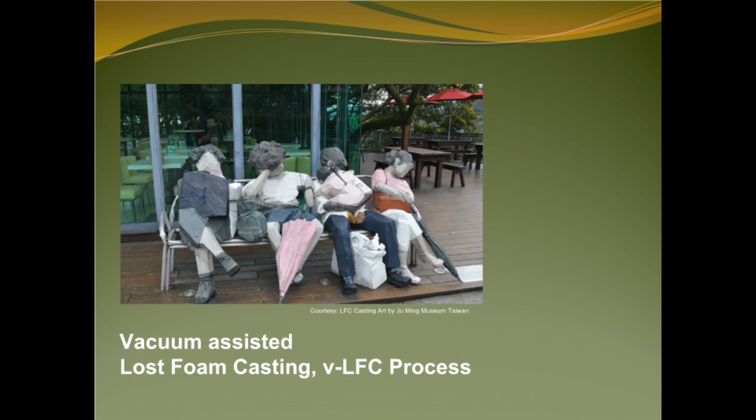Vacuum Assisted Lost Foam Casting, VLFC, is a third generation molding process, and it uses unbounded sand. Vibrating compaction and vacuum are used for stabilization of the free-flowing dry molding materials. Minimum wall thickness of 3 mm can be cast. Typical surface finish of 2.5 to 5 micron or 100 to 200 RMS can be achieved. Typical linear tolerances of plus or minus 0.005 mm per millimeter can be adhered to.

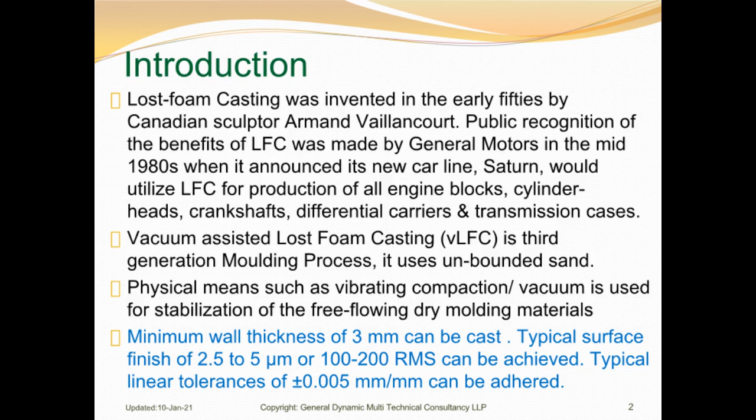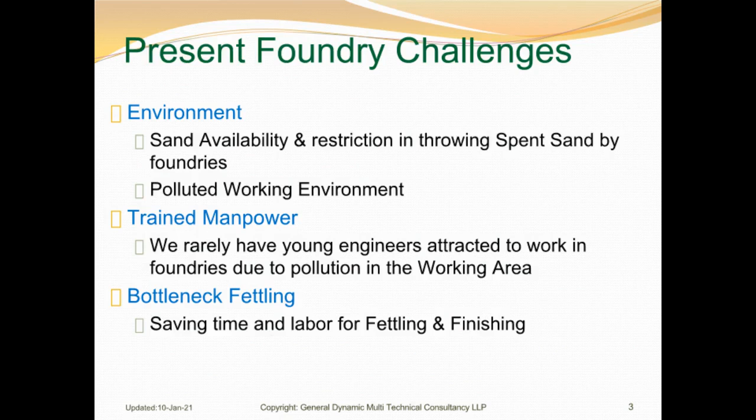We have the following challenges in a foundry today: environment, attracting capable manpower to join foundries, and cost of raw material and power. We promote efficient and modern molding processes and provide end-to-end services for smooth adaptation in your foundry.

Vacuum Assisted Lost Foam Casting Process, and Vacuum Process Casting or V process.

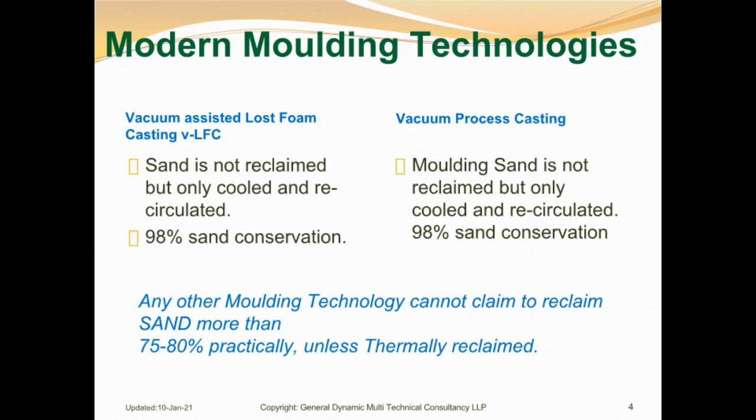Sand is a natural resource and soon going to become scarce. We are already aware of the sand mafia activities in various regions.

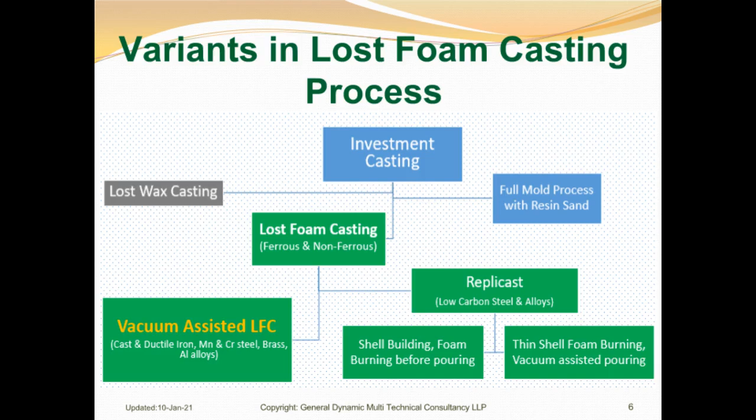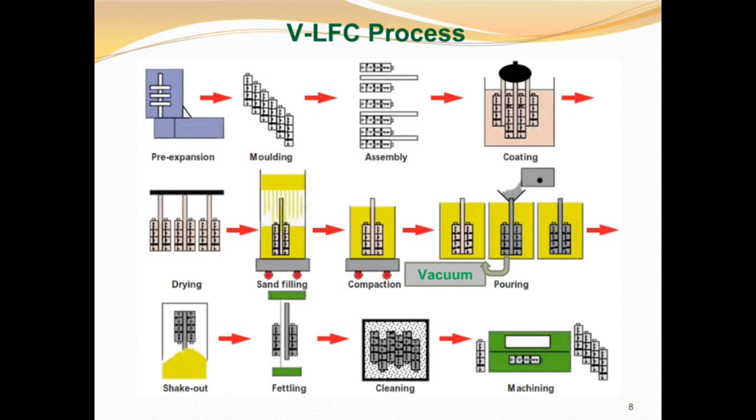Now let us discuss the vacuum assisted lost foam casting process, step-by-step. With 1 kg of EPS we can make 300 kg of castings, so in fact the pattern cost would be just about 50 paisa in the casting cost. That's still amazing to many of us.

Firstly, we have to make foam patterns. Either EPS beads are pre-expanded and foam patterns formed by a molding machine inside our aluminum shaped die, or we take EPS thermocol blocks and cut it to shapes needed by hot wire CNC or manual foam block cutting machine.

These foam patterns are assembled and made into clusters or trees in case of small castings, and then ingate, runner, risers etc. are prepared and glued. This tree is then coated with a refractory layer and dried for 4 to 6 hours.

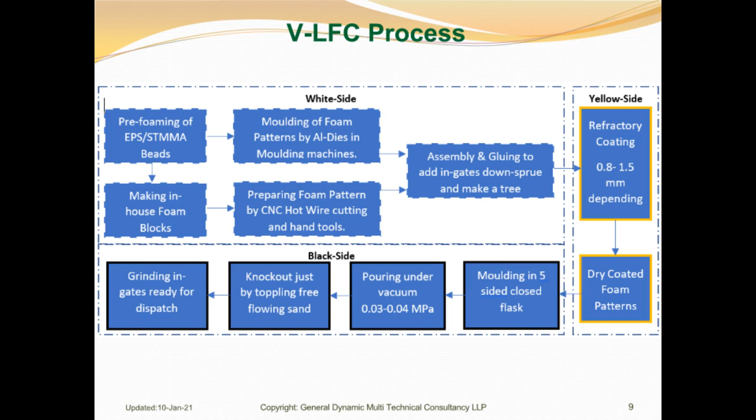This dried foam pattern assembly is put in a vacuum flask and sand is compacted around it with a 3D vibrator. The vacuum is applied while pouring for a few minutes. Then after cooling, the casting is brought to the knockout area, where the casting is extracted and the free-flowing sand goes for cleaning and cooling. It's the most economical molding process which can cast any size, shape and weight.

Optimization of casting weight between 5 to 10% by removing draft angles will save energy, not only in the casting process but in its product life cycle too.

Intricate parts can be cast. No core, so no core cost, no rejections due to core shifting. No fins, so only grinding of ingates is needed. Thin wall castings between 3 to 5 mm can be achieved.

Very good surface finish, 120 RMS. Machining work is minimized. Sand is reused with less than 2% losses. Much cleaner foundry environment. Ductile iron, grey iron, steel, aluminum, brass, Mg - all can be cast very successfully.

Ferrous castings between 5 kg to 8 tons. Most adaptable is the 20 kg to 500 kg weight range, though now expertise has been achieved to cast even 12 to 18 ton castings by VLFC.

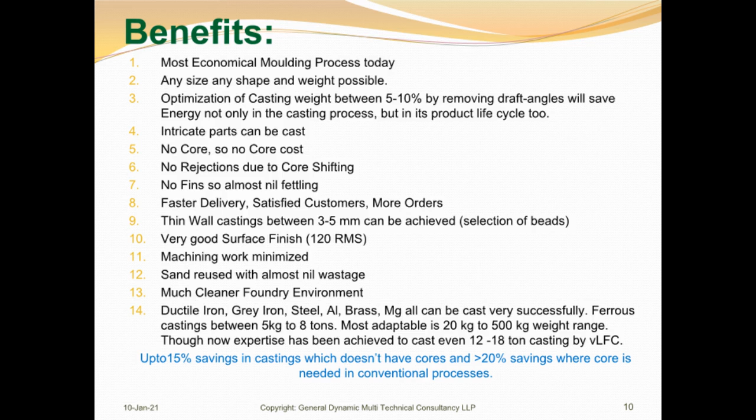Faster delivery, satisfied customers, more orders. Up to 15% savings in castings which don't have cores, and greater than 20% savings where core is needed in conventional processes. Often OEMs in today's competitive age tend to work at zero inventory levels.

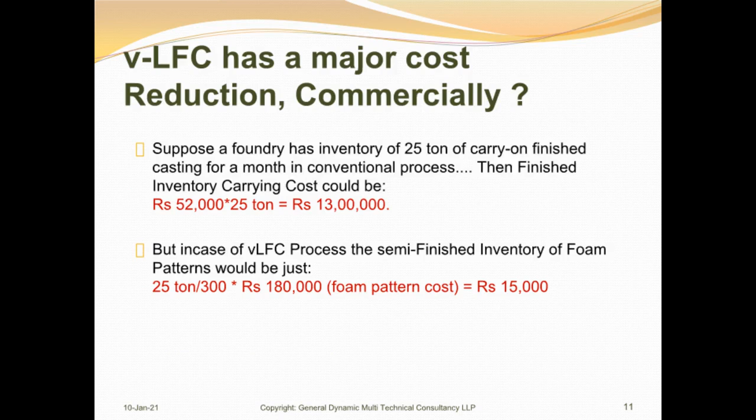The burden is often passed on to their vendors. The more inventory as finished product, the most cost to the foundry, eating away the profits. Energy saved by being efficient - LFC foundries can be maintained as most energy efficient foundries.

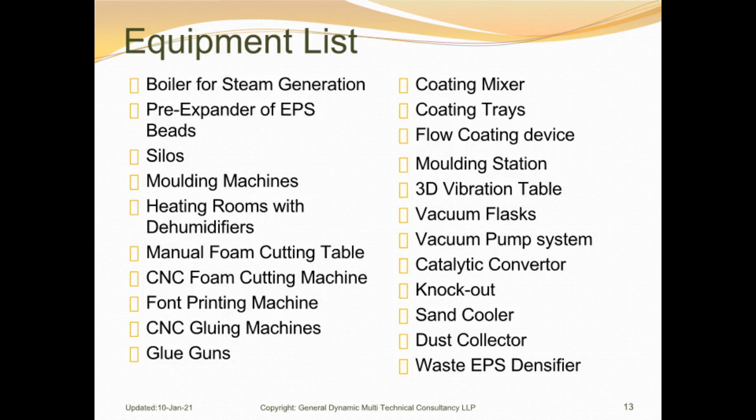This is the list of major equipment which completes our LFC foundry as a whole. There are a few more instruments for pentane measuring, testing coating permeability, and a physical lab and spectrometer. This capital cost is just being shared for an idea. We make a financial sketch of the project to help you in decision making.

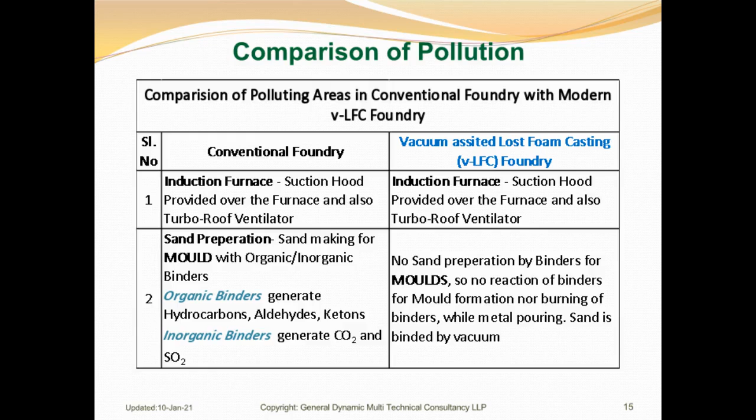Shop floor pollution is the greatest hazard for employees, and most foundries have dirty housekeeping. As a result, most new generation engineers avoid coming to join foundries.

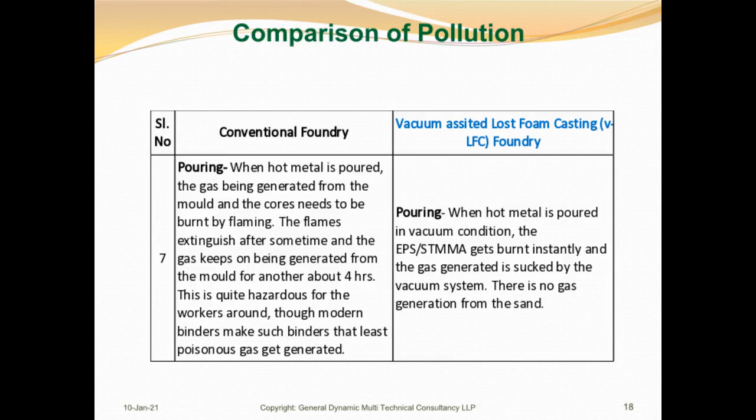LFC foundries can be kept very clean. There is nil release of fumes after pouring, because there is no binder in the mold or core. The LFC process can be considered one of the most environmentally friendly foundry processes of now.

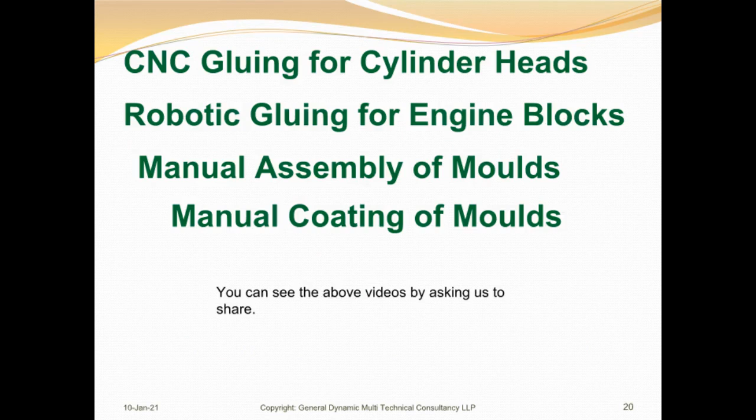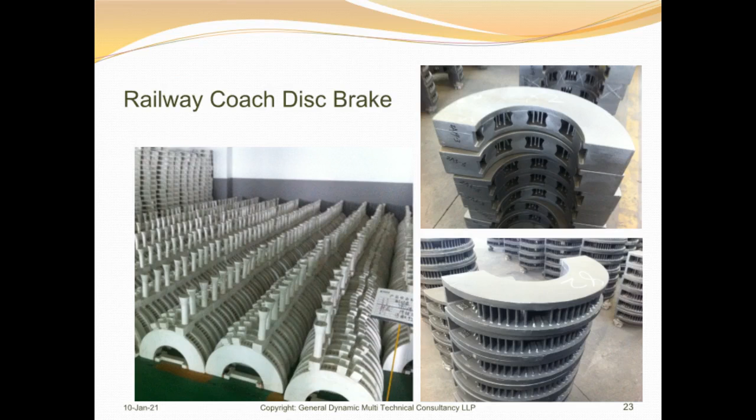Pump impellers have some very intricate castings. Even submersible pumps are successfully being done in India. Almost all castings of tractors are done through LFC process in China. A few of them are being imported to India too.

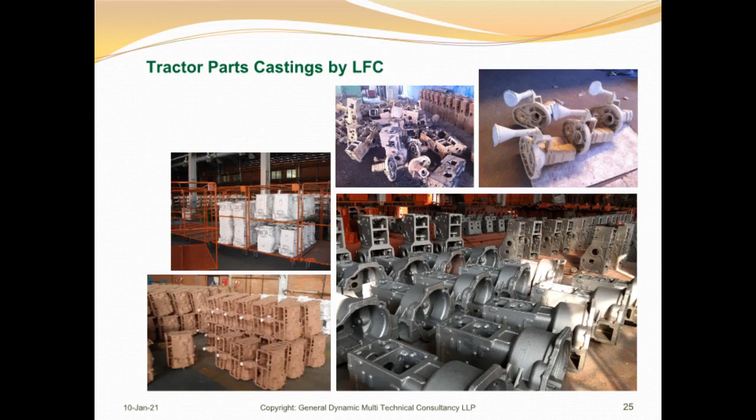Complex automobile parts by LFC process. Steel castings by LFC - the machine shop was adjacent to the foundry, so could see the machining too. Almost no problems observed. Pellet cars and sinter cars.

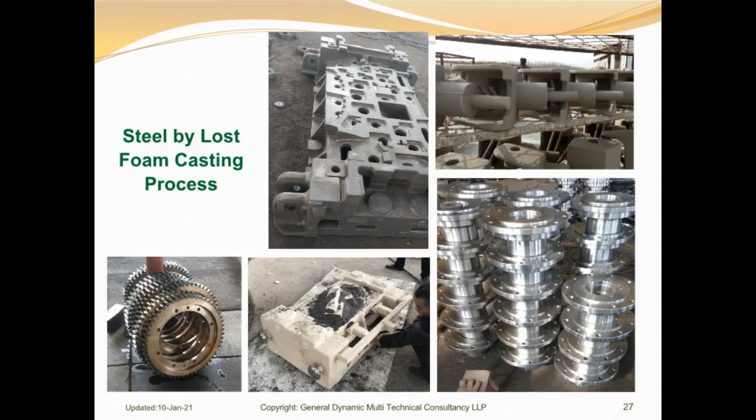In the steel industry, they regularly import grate bars from China due to faster delivery. A few foundries in China and Russia are producing excavator teeth and chain links of tanks and crawlers by LFC.

Large grey iron castings and steel castings are made regularly by LFC process. To save cost and due to ease of molding, various large castings are made by LFC process. These manganese steel claws are used in aluminum production process.

Aluminum alloy castings are gaining much importance in vehicles. Copper alloys, brass castings especially for valves and the firefighting industry.

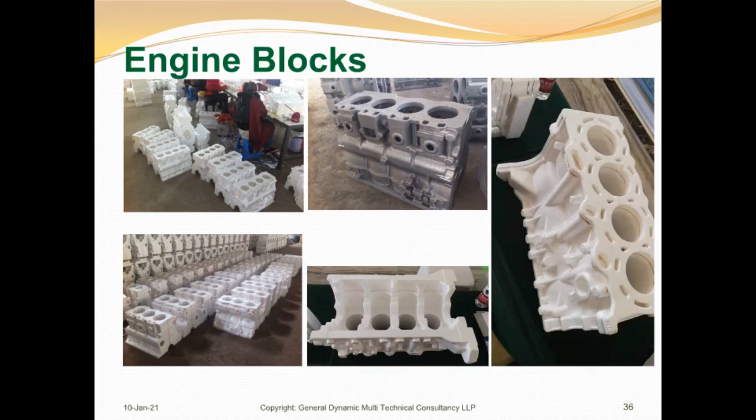Small tractor engine blocks can also be used to make diesel engine generators and save costs. Engine blocks for many types of engines can be done, and the cost of shell core is saved. More heavy engine blocks, cylinder heads by LFC process.

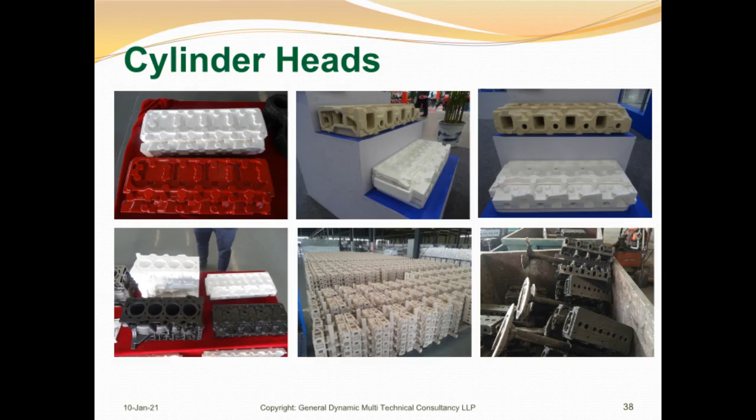We provide end-to-end support: plant designing as per your specific needs, sourcing of equipment, supervision of installation and commissioning, hand-holding for a minimum of 3 typical castings, and shop floor training provided by us.